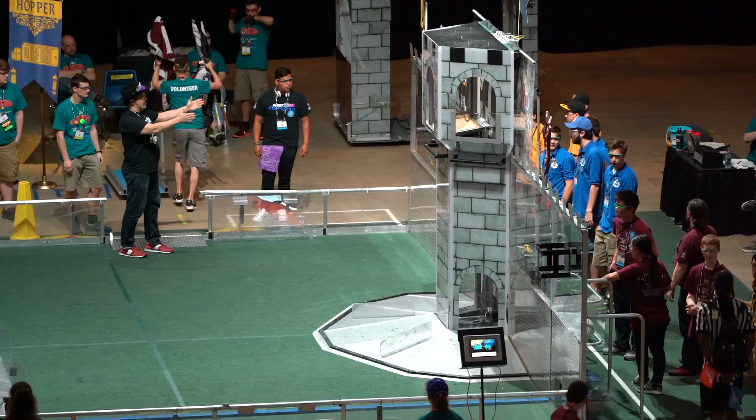And we have the legendary Team 971, rounding out your Blue Alliance, Spartan Robotics all the way from Mountain View, California.

3, 2, 1, charge! And welcome back to this opening qualification match 55 here. And, bingo, autonomous, they have scored up top, nothing but chain. And 971 down that Blue Alliance coming on the other side. Bingo again, and it ricochets off. Coming out of Auto, Red Alliance 12, Blue Alliance 50, and the action has started.

Welcome back to an exciting day of robot competition here at St. Louis. 17-12 at the bottom, 971 working that top. That's the Spartan Robotics, Blue Crew, and Dogma. Under 15 seconds, 971 attaching that, and up they climb. Job well done, 1769.

Charge. 971 quickly grabs the boulder from midfield. Their teammate takes a shot. Another shot from 971. Two quick autonomous shots from the Red Alliance. 971's going to try again for a third. And they've got it. 3 autonomous shots for the Red Alliance.

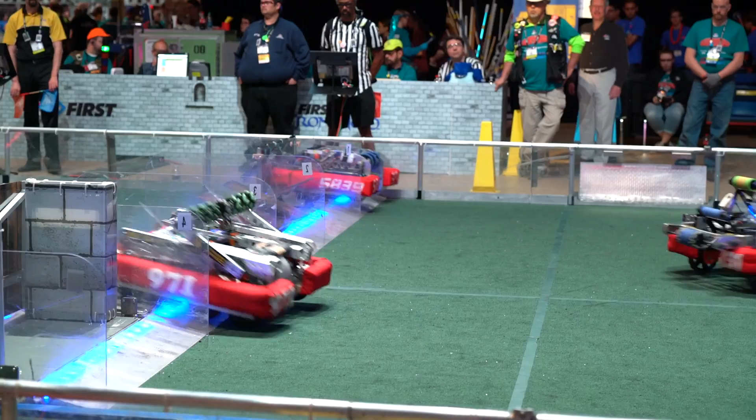50-30, advantage Red. 231 High Voltage ducks in the low goal. Voltage comes back over the rough terrain. 971 makes another shot. Spartan Robotics from Mountain View, 26, knocks in the low goal. The light goes out, they get a point.

Here comes High Voltage, low goal. 971 gets a high goal. Spartan Robotics has scored. They've got several goals already in this match. 106-81, advantage Red.

More Martians up and over the CDF, taking out that defense. 971 trying to score more. Martians ready to get the goal over. They lose it over. 40 seconds to go.

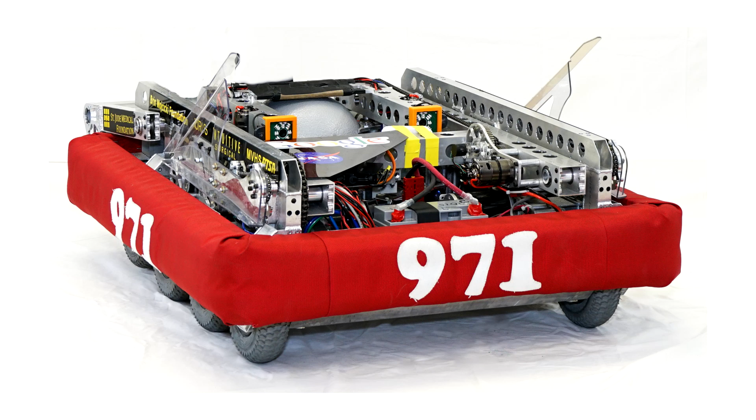Domo arigato, Mr. Roboto. Domo. Domo. Domo arigato, Mr. Roboto. Domo.

Passes through the castle wall. Alliances may have only one robot at a time in their own... Do you want to go back to maybe the field? They might have the... because that—

This would be for these group meetings, we're going to talk about strategy, not robot design, just strategy, because we need to get a good strategy before we design something. As long as you've got your exposition right.

I'd say it takes like 2 seconds. You have to make sure you line up. It's a simpler mechanism because you don't have to worry about the high goal stuff. It's relatively independent, and we'll divide back up into the groups we were just in and go talk about

design strategy. If we score in the high goal, that still means we're... that's compared to 2 times 2.

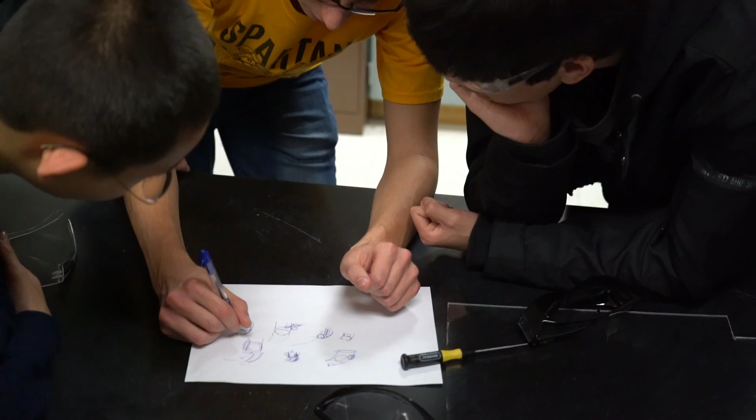Yeah, I think we're going to be flying over it. How tall is the bot? But it's only 2 tires. Is it more accurate? I don't know. It relies less on how firm the ball is and stuff.

We are making a prototype for a shooter, and what we're doing right now is making it out of 80-20 and angling it to test variable shots, to see if the dodgeball is actually able to shoot a certain distance accurately.

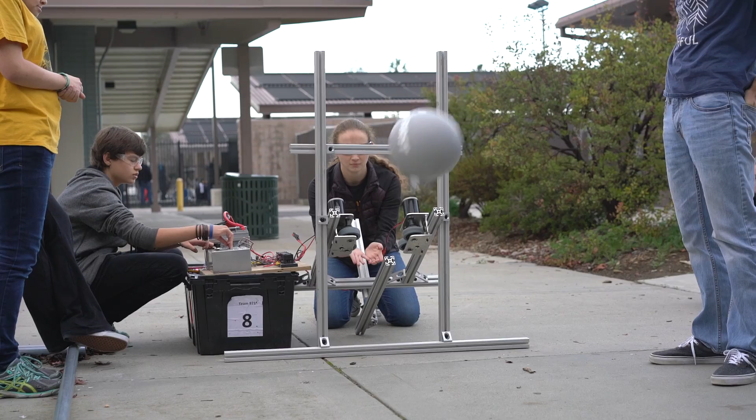We're making the upper goal for the robot to shoot into. This stuff, we might have to draw some center lines or something.

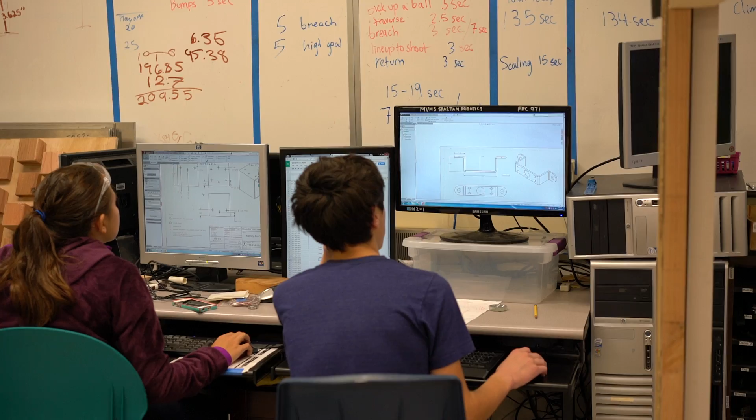What is wrong? You guys want to try a different height? I mean, we want it to contact the ball about in the center. Try moving it to the center.

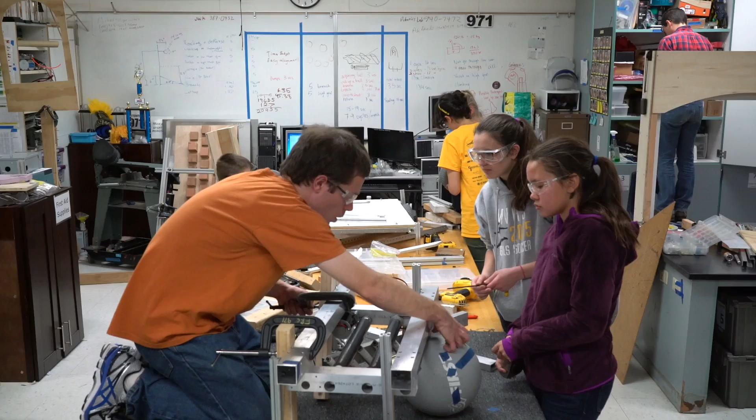And you can kind of look right here. That's where it just stretches. It's just the bottom one first. So let's try and move this one down just a little bit.

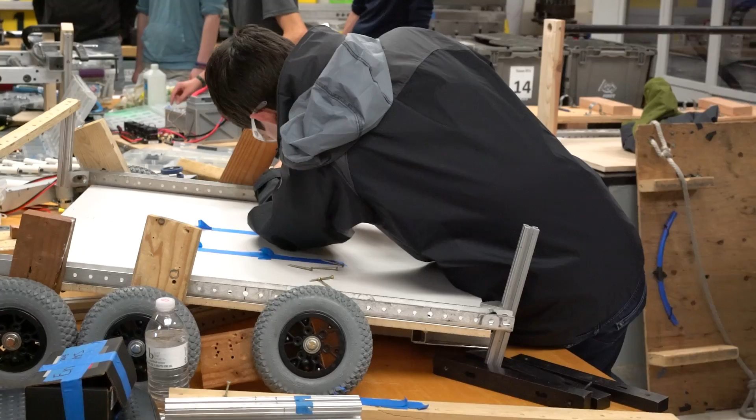So let's try lower friction on this, guys. Different angles. Yeah, we're just seeing if the angles... we figured out the rolling.

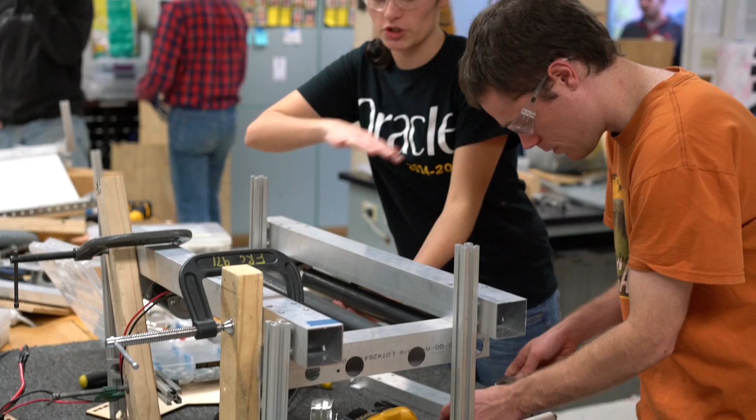So we have this intake prototype where we have these rollers on the top that are pulling the ball in. We use last year's intake arms to simulate what it would be like if we had powered rollers right here. And that worked really well.

We wanted to see what would happen if we just had them as passive rollers so they weren't powered, which would decrease the complexity in terms of design. So it's angled this way, and we did a 30-degree angle and then a 50-degree angle. Now we're just trying them vertically to see what the difference is.

Yeah, I know, I want to show Travis the channel settings. This is the same speed that was on the last one. Oh, right.

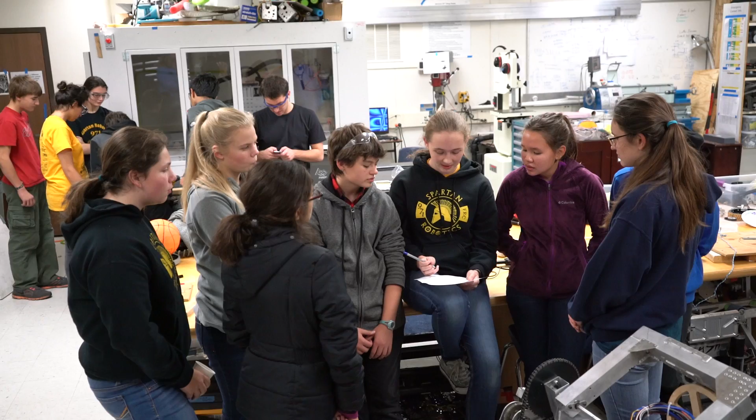These can all be done at like the exact same time. Yeah, exactly. That's why we're going to break them into 47 watts for the Vex Pro 775.

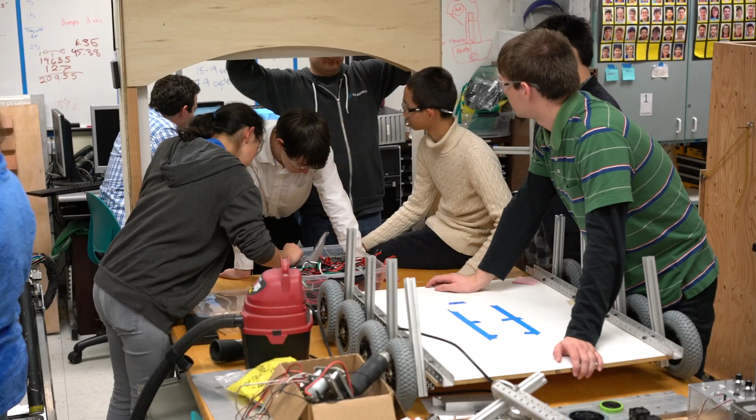So that one's smaller but more powerful? Yes, except it has more thermal mass than the 775. So in the long run, it will run longer than the 775 at that power because it won't fail. There's a lot of statistics out there for motor testing and all that.

We're prototyping a shooter. So we made a little launcher, and we're testing different spin speeds of these wheels, seeing how different wear on the balls and different balls impact the trajectory and distance of the ball. Also the loading and the angle, and how everything affects consistency with our shots.

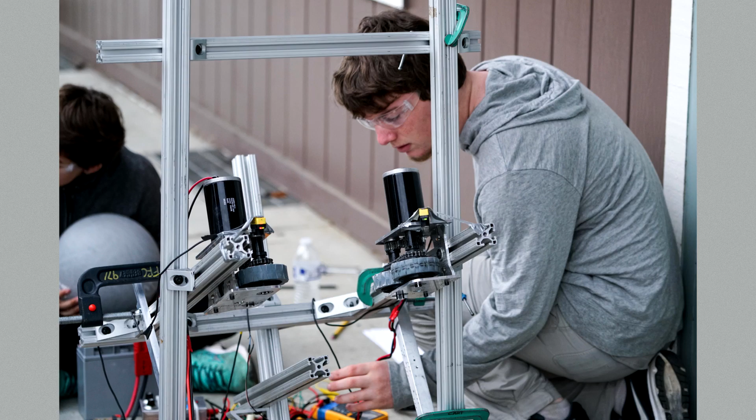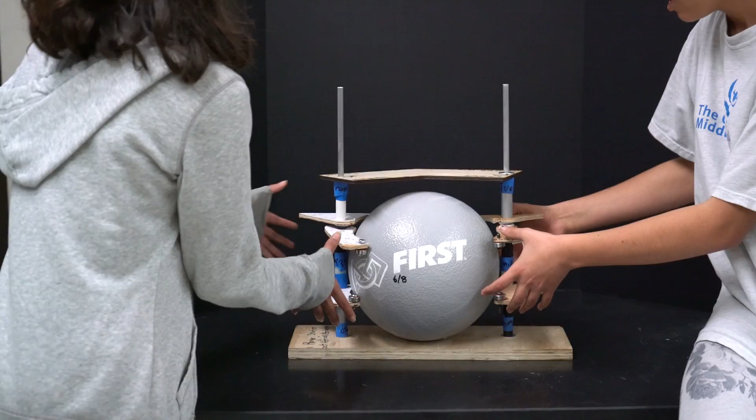So we were prototyping the intake to shooter feeders. First the two front pieces with the bearings come out, and the ball comes in from the intake. Then they close in on the ball and these bearings help push it, and the entire feeders, all four of them, move together as a whole, pushing it through to the other side, where the shooter is.

You can have different zones, right? Yeah. Also, we wanted to be able to package everything down so we could fit under the low bar. We also wanted a high goal shooter and quick cycles.

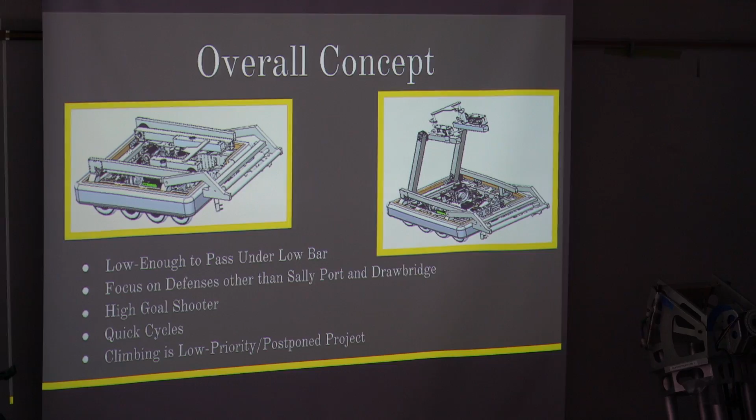As you can see, it folds down so that it can fit under the low bar, but folds back up to shoot. It intakes the ball down at the position on the ground, and then brings it up here and shoots it. It flips around to shoot it.

And then there's the fingers, which really help to capture the ball and then push them forward. It's really about speeding up the process between the intake and the shooter. So then it gets the ball in when it comes up here. You can imagine this happening a lot quicker than I'm able to move the mouse.

Then it moves up into the shooting position. It shoots at about 6,000 RPM, which is pretty fast. If you guys saw our prototype outside, it's very similar to that, with the same wheels.

Yeah, we found those wheels work pretty well. We had rubber wheels before, but there was some variation - when they spun really fast, they would expand. So that was a little iffy, and these worked pretty well.

Just finished week 2. This is the first day of week 3. For those of you who don't know, we got the drive base released to our sponsors last Tuesday. That meant we finished up our CAD and delegated the parts we can't make in-house to our manufacturing sponsors, ScreenTech and Creative.

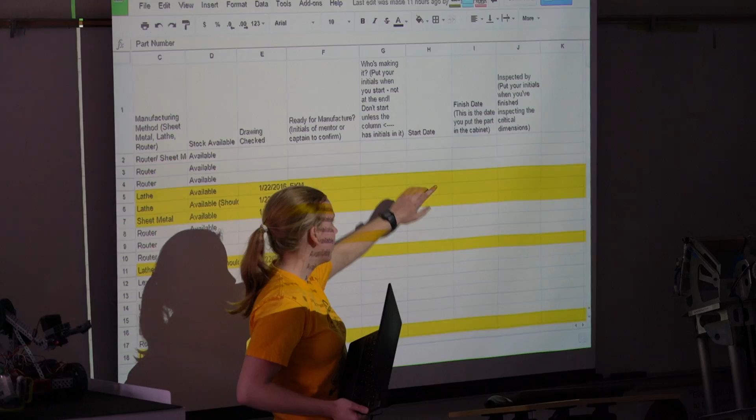We should be getting parts back from Creative on January 29th and parts back from ScreenTech on February 5th. In the meantime, we need to be doing our own in-house manufacturing. To make sure you're tool trained, consult the 2016 robot parts document. Find those parts that have initials, and if you want to make that part, put your initials in the who's making it column.

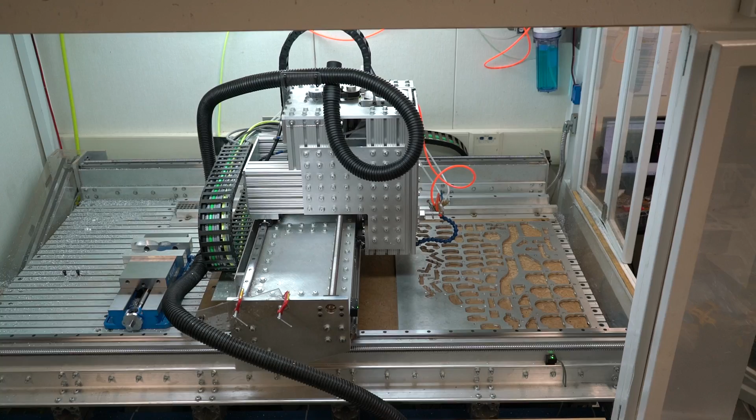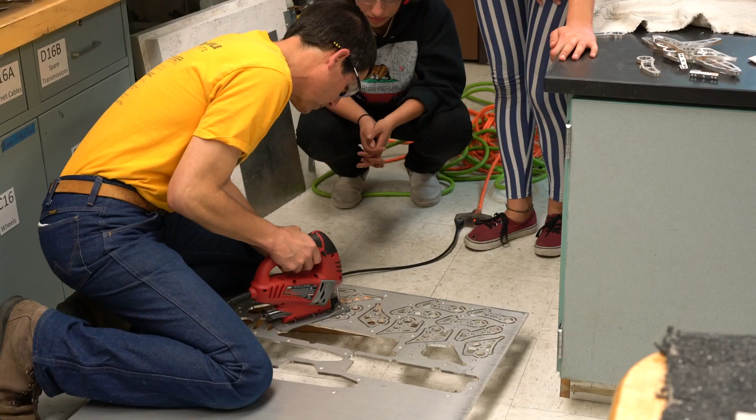Yeah? No, that's not the first thing they asked us. You want to do something? I'll do this.

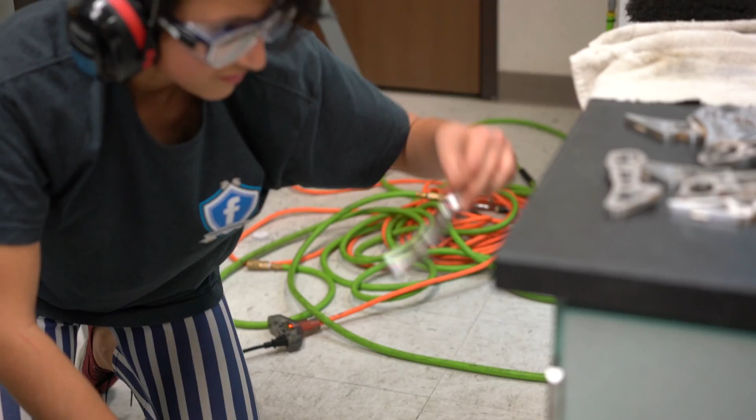I'm deburring and cleaning up the parts. Nice, that was very efficient.

I'm making a whole bunch of spacers for the robot, and this year there's a lot needed for rollers and gearboxes.

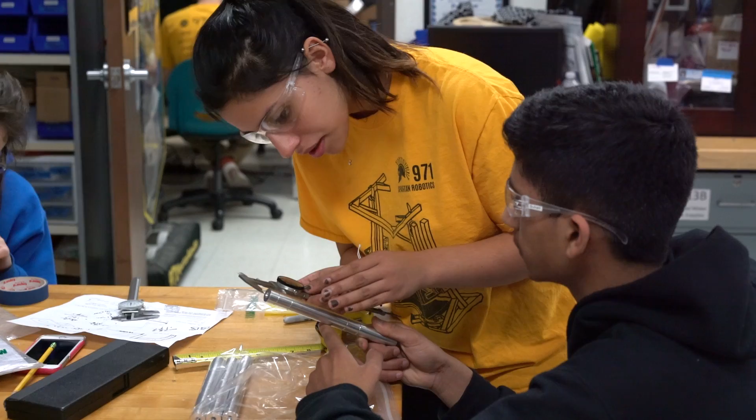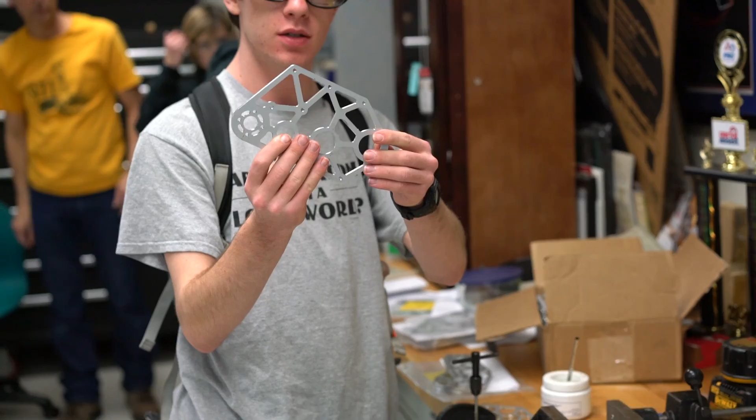I'm putting threading in the holes. It's a process called tapping. It uses this tool here called a tap, and it allows you to end up with a part like this so that you don't have to use a nut to be able to attach a bolt directly into a piece of aluminum.

So that I don't lose what that other name is. Got it, okay. Never put McMaster in.

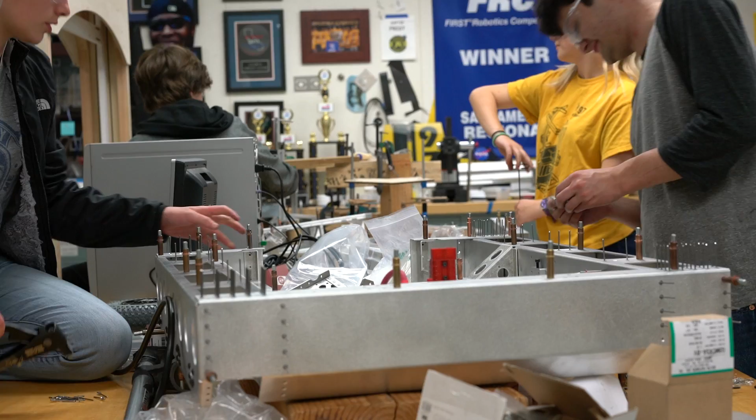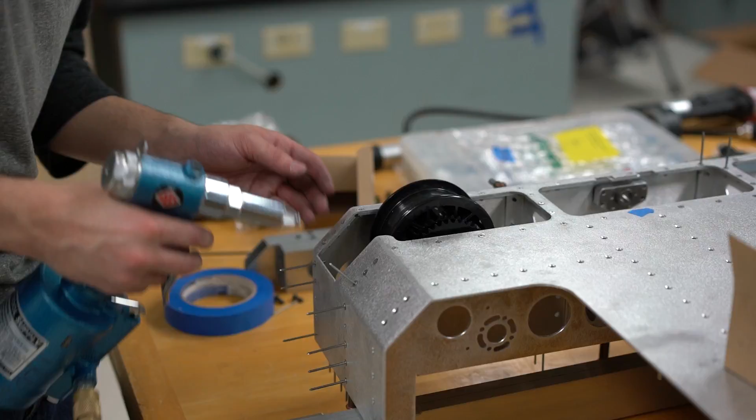Figured we'd just give a quick update of where we've been in build season and what's going to happen in the near future, up through our first regional in 4 weeks after stop build.

So we're in the process of finishing up manufacturing and starting assembly. All the sheet metal parts are done, thanks to a lot of you guys. We still have a couple more router and lathe parts that need to be done. Those should be finished up this weekend.

We're trying to get everything pretty much assembled so that we can take our drive base and superstructure out to get welded on Monday. We have our sponsors ready to do that. So making sure assemblies have all the parts we're going to be building for the next few days - 2 Tuesdays from now is when stop build is.

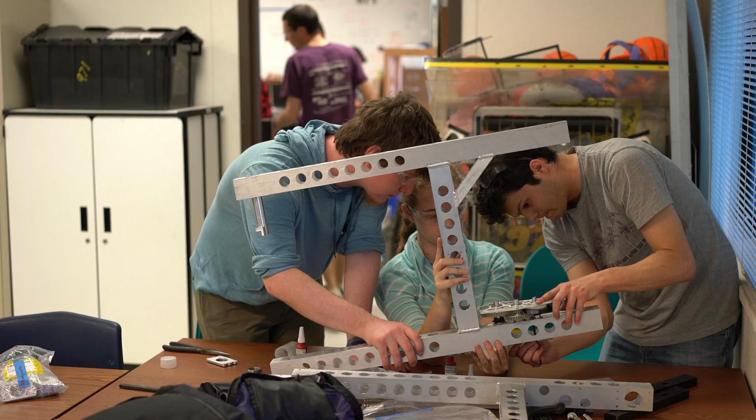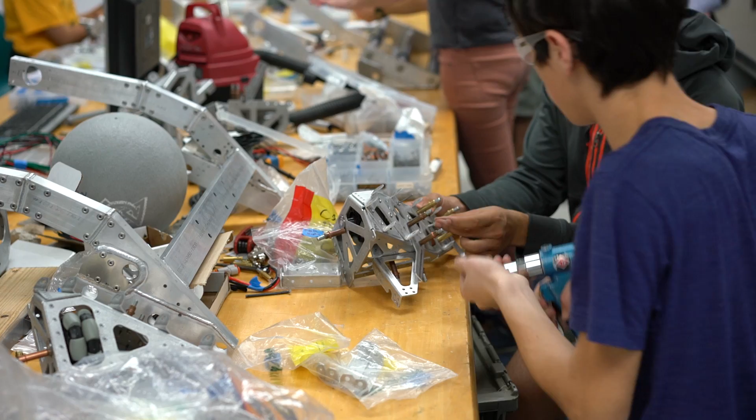Taking a sneak peek and then I'm gonna go. Hey, I'm gonna find it and it's gonna be exact and it's gonna be good.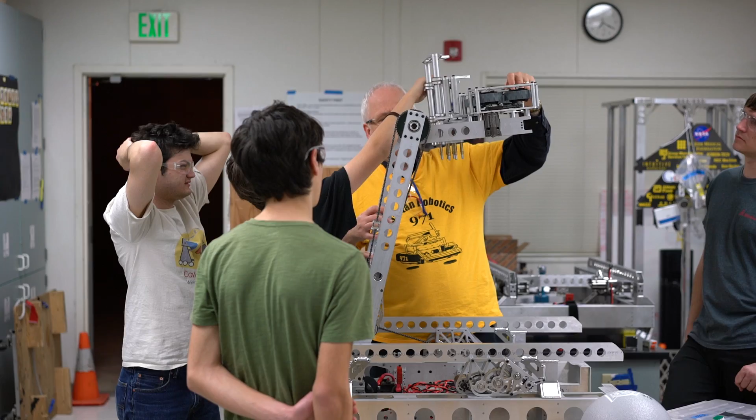Yeah, we have the shooter. And then we can also shoot that. So it's actually like 200 degrees of travel, with your center being 100 degrees out. Right, so in the resting position, it can't go above this, right? Right, and it just moves like that. Run it out this hole and into this hole.

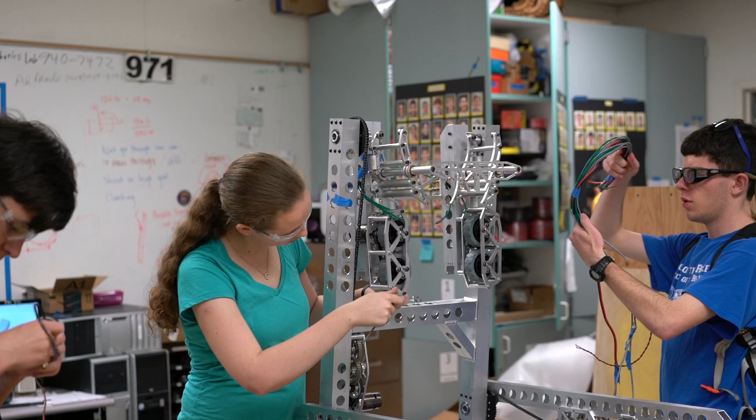I'm gonna put this one in this hole. Yeah, it's easier, you can start with. You start the ones going down, get 'em. Keep it down.

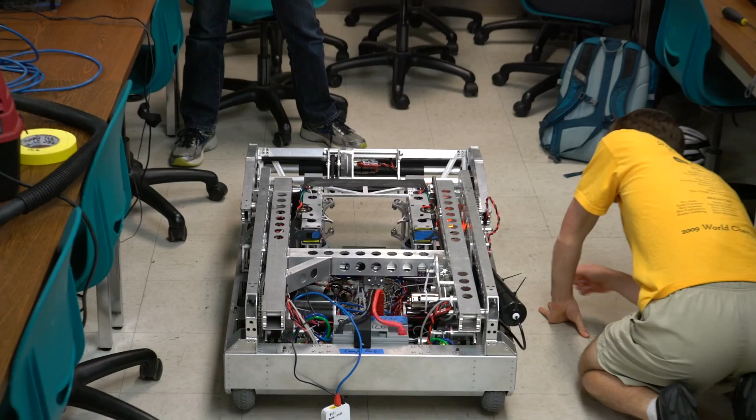Either you're two people doing all the same thing. That's it, so close, I got that. Go.

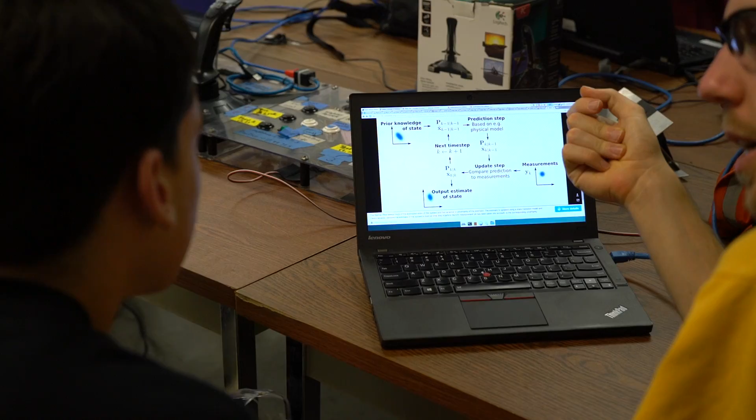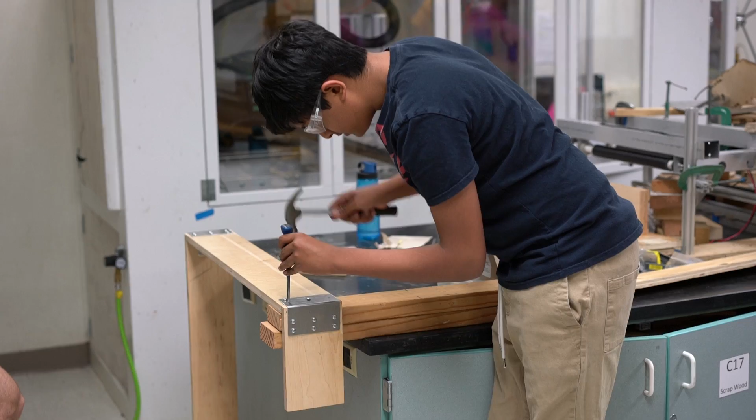Makes it sound like you don't have rails now. Are you guys opposed to slitting this?

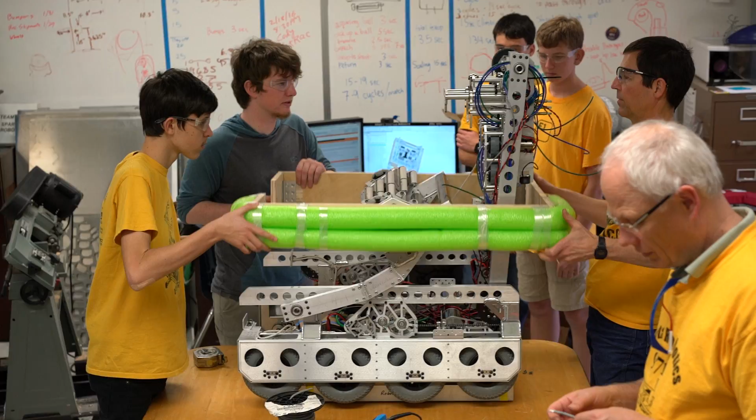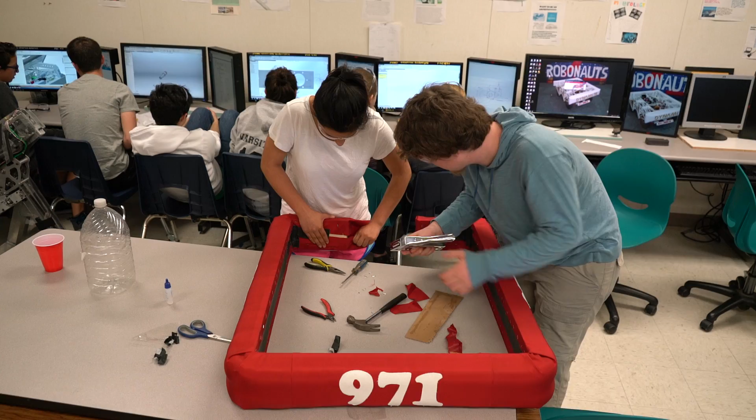Got some fabric. Yes, yeah, so that was the one time. You don't need to make that weird funky stuff. This one's a little above. What an error, see, I just fixed it. Yeah, that one, where the train. Okay, you know where they're supposed to be? Supposed to be.

We need to take a piece of tape and run it all the way around the bottom. Gaffer?

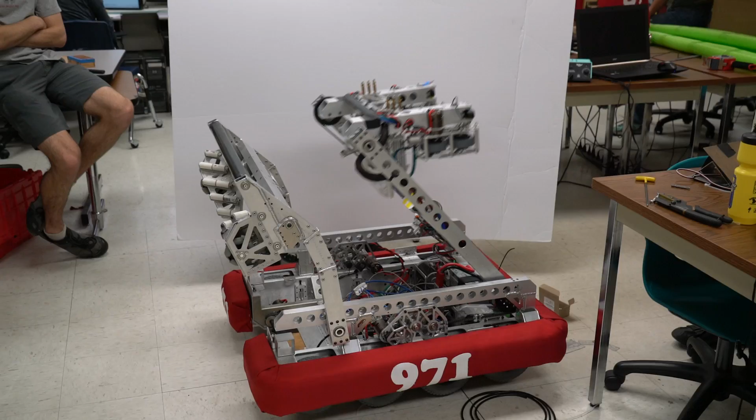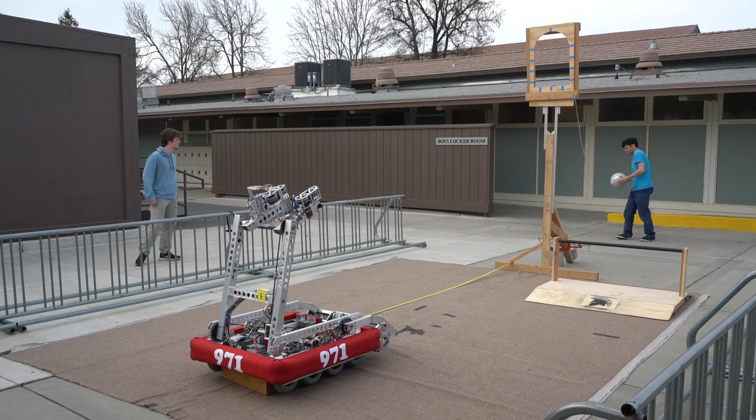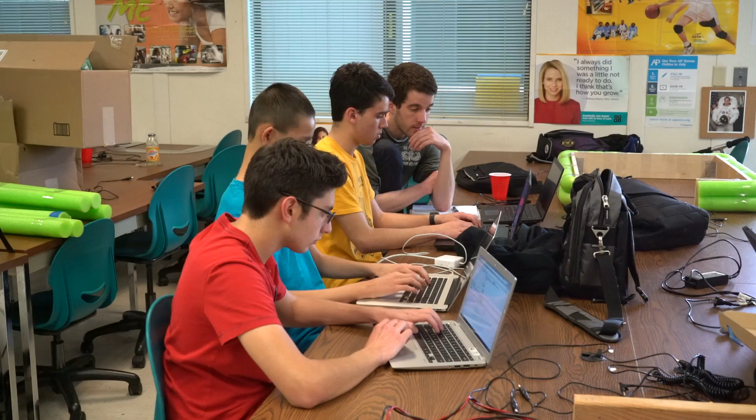Right, okay, cool, this is the intake 2.0. Because the first one wasn't directing the balls as correctly as we wanted, and it wasn't fast, so it was really heavy. Yeah, so this one's lighter, faster, and better at centering balls. Overall better.

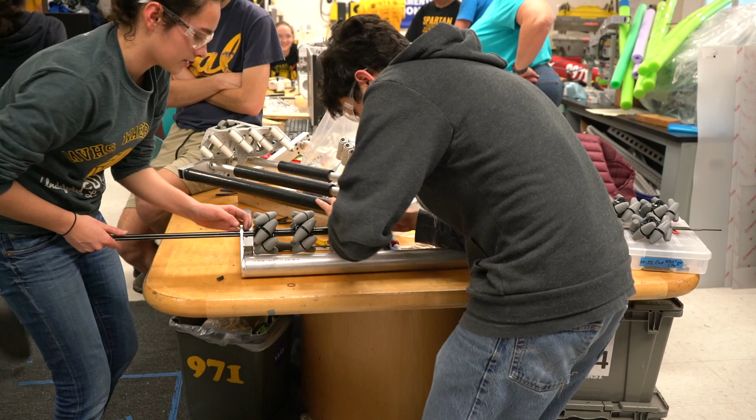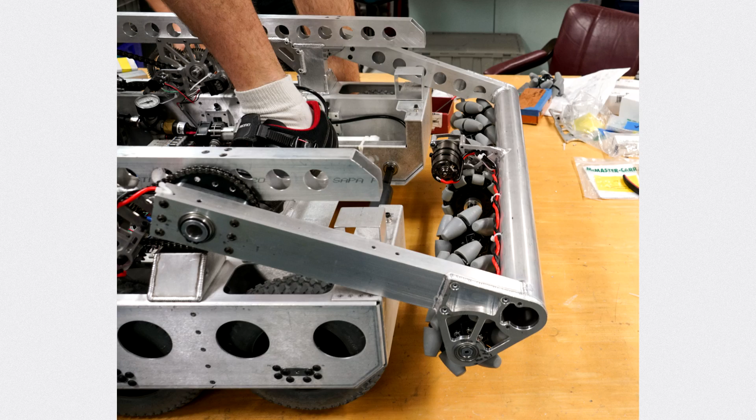We're still sorting this out. I'm open to anything, ladies. I think you figured that out by now, but I'm just saying it one more time.

So this is our wedge. Right now it's collapsed. When it goes, this piston contracts here and rotates this. How it does it is it attaches to this chain here, which pulls this sprocket around, which moves this down.

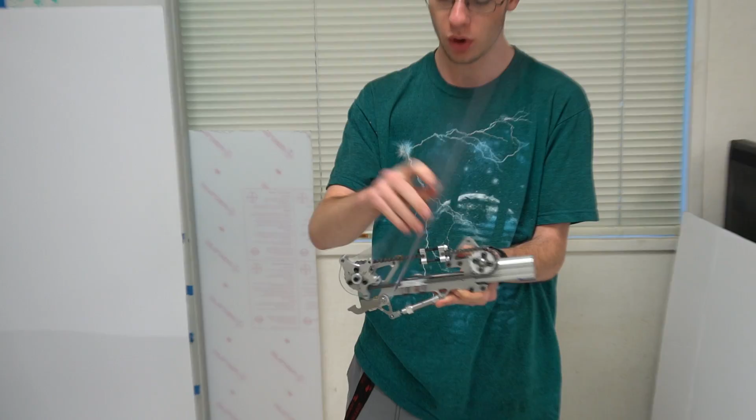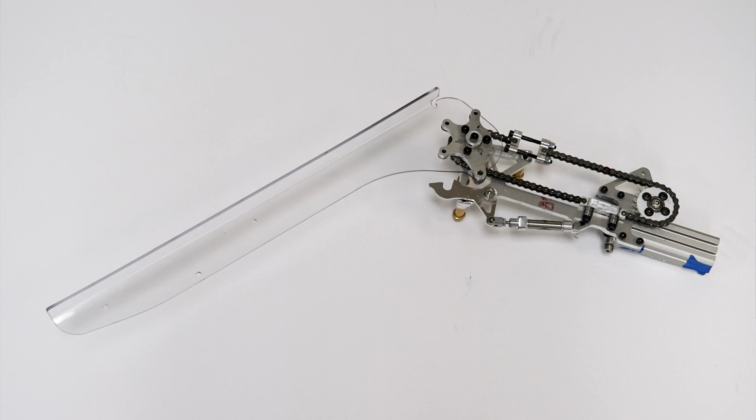Now this wedge has three positions: one is completely retracted, one is completely down to go into the portcullis, and one, if you activate this piston here with this latch, when you push this down, it will latch in place part way down. And on the actual wedge, we can choose to have another extension here to go over the cheval de frise.

With the latch now? That's pretty sweet.

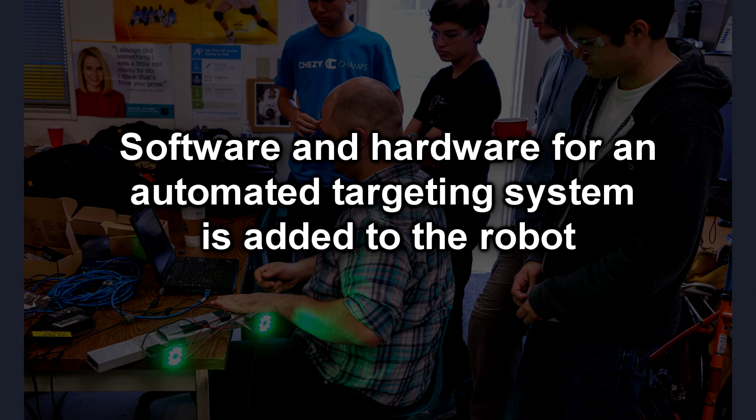Okay, oh no, come in at angles. Try and figure out how to do that. No, you're hitting.

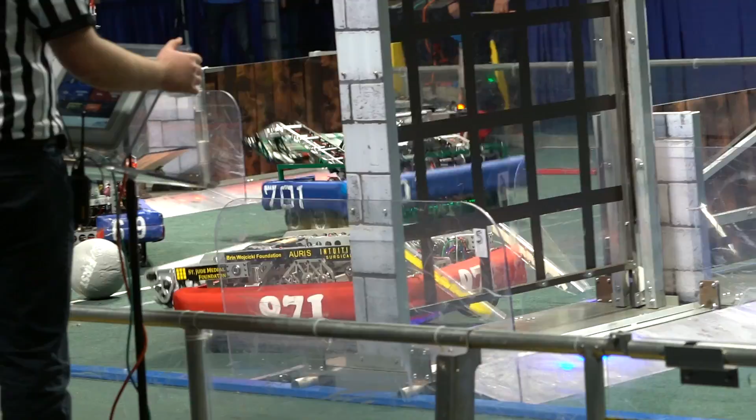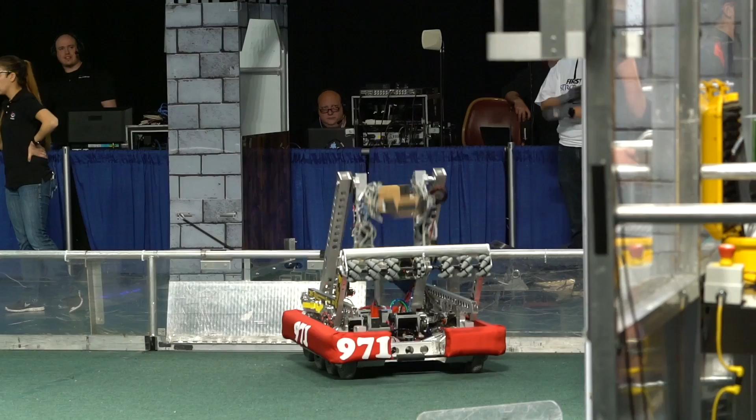Shot there from the middle by 3669. He's got a shot, we can shoot and score from the courtyards. Spartan Robotics under the portcullis. RoboLights working on that ball debris on the red line side. He shot and scored from Spartan Robotics on the blue tower. The blue tower is now fully weakened, and on the blue defenses, four of them are down, meaning the Red Alliance has earned their 20-point bonus for defenses, and they're prepped and ready to...

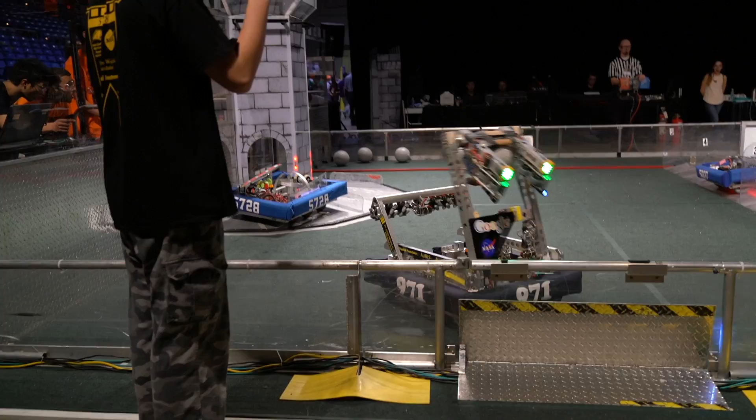Lining up a high goal shot, 971 for the high goal. 971 was first seed this morning, and they briefly lost it. They're looking to regain that status as the top seed of this competition.